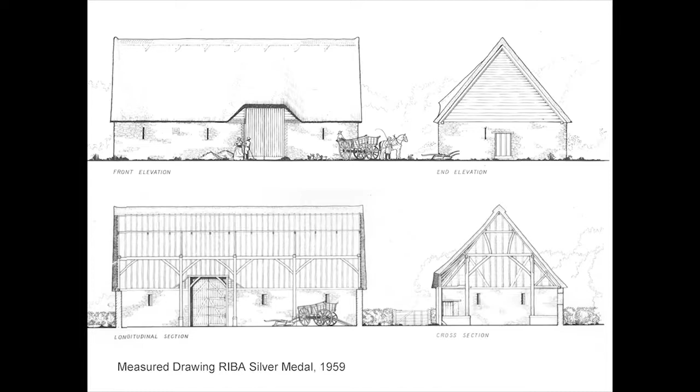So I start really with the first time that I stood on this platform, which was in 1959, with a measured drawing which received the silver medal at that time for measured drawing, and the huge sum of £100, which translated backwards was really a very considerable amount of money and did enable me to travel. I broke the convention at Manchester and concentrated on what would be perhaps later called by Bernard Rudofsky, architecture without architects. I feel there are many lessons from humble, ordinary, wonderfully dignified, simple buildings.

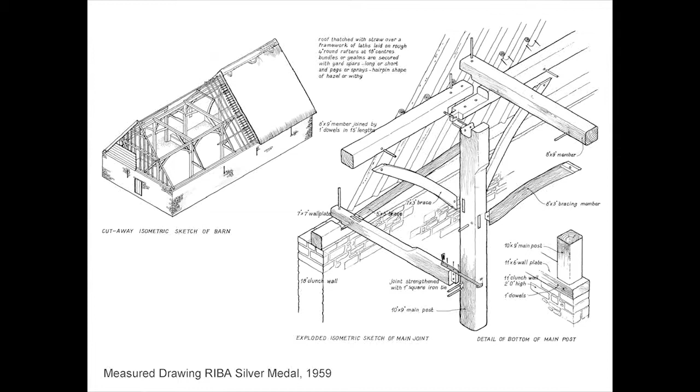But whether it was my interest in the city at the same time, I'm always and still fascinated by the inner story of a building, and not just the building, what lies beneath the surface in terms of a city, an organization, whatever generates the need for a building, or the way in which a building is made. And later, as a student in 1961 in the United States, I became fascinated by another kind of simple barn, the kind of industrialized agricultural buildings here in Kansas, the Great Plains, the Midwest.

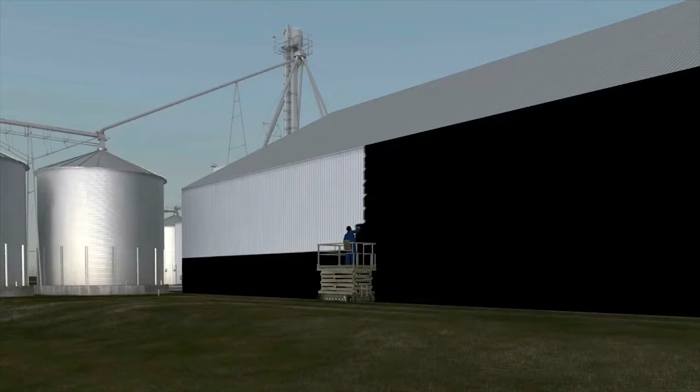And artists as visionaries also fascinate me. I live with this work. It's positioned between our bedroom and our bathroom, so I pass it every day. And it's by John Gerrard. And the story is that Angelo Martinez, this worker, will arrive at this building, open it up, it's filled with oil sticks. And oil sticks are the kind of materials that Richard Serra would use to make his extraordinary black paintings on white paper. And this man is painting with these oil sticks this barn black.

And the story behind that is that the agriculture which generates this building and which depends on oil is finite, it's peak production. This will run for 30 years. It's on real time and it's also imaginary time. It's based on a real building, it's in a real landscape, and it runs day and night, 24 hours. And when it's finally black and all the oil sticks are used up, and symbolically, peak oil, then it will expire, and the way of life that goes with it. Now that's a kind of interesting doomsday scenario.

And the great energy debate is really quite interesting in many ways, because certainly all the previous predictions about oil have proved to be wrong about when it does peak. But the reality is that more coal and gas is being used than oil. And over the 200-year period since carbon started, going back to 1800, when the carbon to hydrogen ratio was something like 10 to 1, we're seeing a decarbonization even through fossil fuels. And by about 2100, fossil fuels are predicted to be 90% hydrogen because the ratio has moved to 1 to 4.

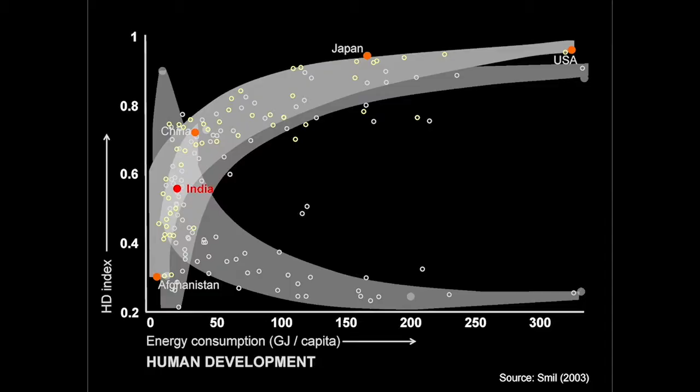And likewise, the index of human development, a complex thing about education, emancipation, or indeed political freedom, all relate to the intensity of energy consumed by a society. So there's a very strong social, moral incentive for the distribution and availability of energy.

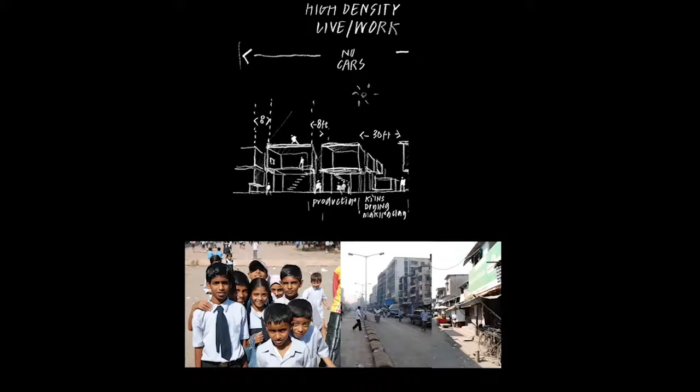And just to briefly give some insights into what makes that neighborhood tick, here's one of Narinder's sketches at the top, and it identifies that 30-foot wide road housing the kilns for one industry, which is making pots.

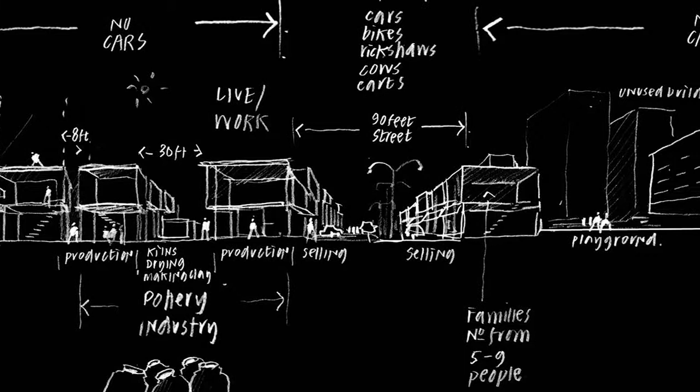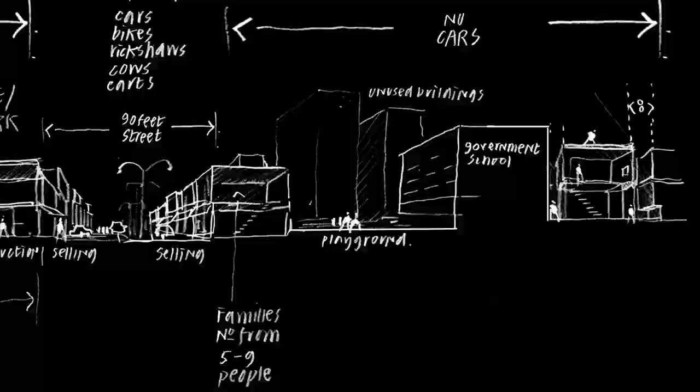And those pots are made, the clay is on site, and it moves through the home, live, work environment onto the street with the traffic, and that becomes the retail shop. And as you move across and you see the government schools which have been injected into that environment, you realize also that the playgrounds and the railway tracks and the cemeteries are the only public open space in that very, very large community.

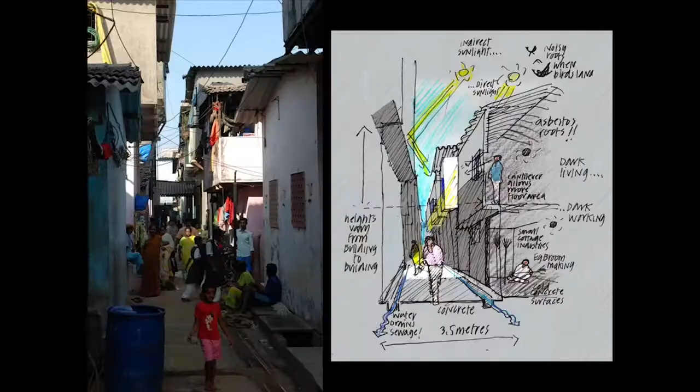And exploring what lies behind the facades, how the activities overlap, how they work horizontally, how they work vertically, and discovering the people who make the brooms, who weave, and whose dependency is literally on the pedestrian crossroads.

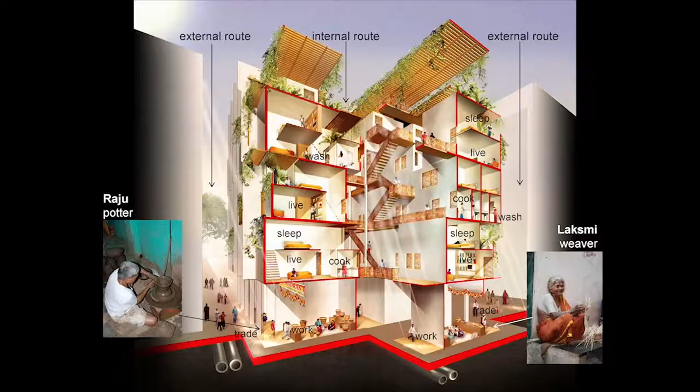That led to the proposition of essentially something that was low-rise, walk up, and would provide an enhanced quality of services in terms of sewage. It would not be open sewage, obviously. It would be a network below these pedestrian routes, which would respect and enhance the best qualities of the existing environment, but obviously significantly improving the standards of living.

And here we see those individuals in terms of the traders, the weavers, the potters, and it also raised the proposition of such an essentially very, very basic structure, which by its concentration would create a degree of open space in the community. And this was a model that would perhaps be able to be applied in phases, in stages.

A key element might well be a sort of heart unit that would address the issues of sanitation, cooking, heating, ventilation and cooling. And we took our inspiration from a unit that a research unit in the practice has been working on, which is a heart unit not for emerging economies, but very much for the developed world,

something that would use less energy, would be a prefabricated unit, could address the issues of heating, cooking, all the things which as separate units would cluster together to make one mass-produced, highly economical core unit, which would save energy, would save space, and would deliver a higher quality of service.

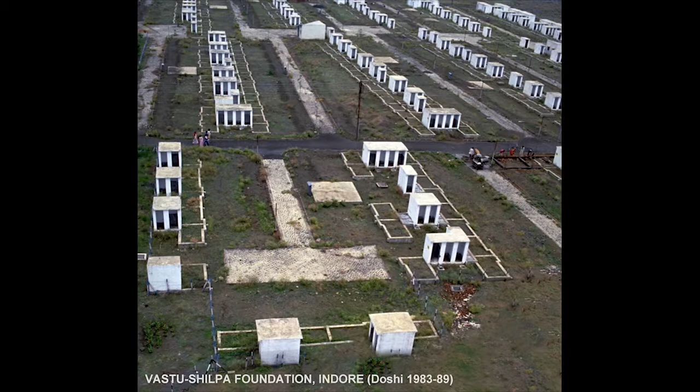And here, the foundations for a unit have been provided, and the equivalent of the heart unit are those boxes which, when you take the box away, reveal the heart, which is the sanitation, and also the kitchen, the basic essentials. And then emerging around that is this extraordinary, very, very vibrant community. And interestingly, just to the right, behind the trees, you can see that vacant plot is waiting for somebody to do a self-build. It's a very, very small extract of an extraordinary, rich series of images of that community.

The percentage of the population, the over 2 billion who live in the slums at the moment, and the proportion without sanitation, again, 2.5 billion, or a quarter of the world who don't have access to power as electricity, or even in terms of clean water, 1.1 billion. Adequate shelter is nearly 2 billion.

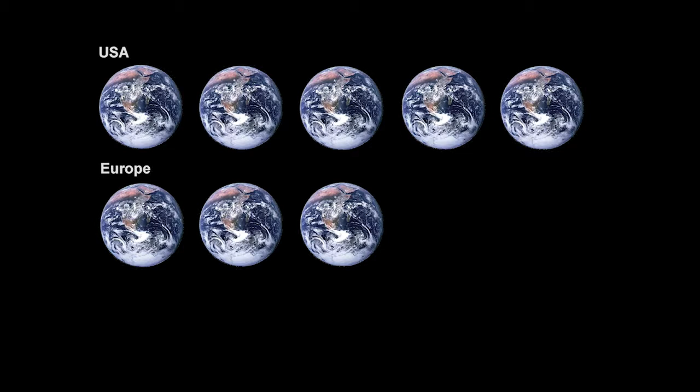And it's important, I think, to remember that it's only because of that that we, in our part of the world, are able to have the quality of life which the World Wildlife Fund would calculate would be in America something like 5 planets, and in Europe 3 planets. So it's a very interesting question about how, given all these debates about energy, population, changing quality, we achieve a one planet existence.

And it's really against that backdrop that I thought it might be interesting to share some of our reflections, observations, and experiences in the quest for sustainability. And obviously the imperative, and people have put it in different ways, but essentially the challenge is how to maintain the quality of life, to extend that quality of life across the planet. And obviously the challenge is doing more with less.

And Buckminster Fuller, a mentor, a dear colleague for the last 12 years of his life, this is the autonomous house that we worked on together, the solar house. That was in 1982. I became much more involved through the exhibition of his work in the Ivory Gallery in Madrid, which I co-curated as an exhibition with Luis Fernandez Galiano.

And in the process of that, had some extraordinary insights into this man who, in 1927, conceived the idea of a Zoom-mobile. And the Zoom-mobile would be an emancipating vehicle that curiously anticipated the Harrier jump jet of many years later. And he saw it, the air-deliverable Dymaxion house would enable, with the Zoom-mobile, you would travel in ground effect or you would fly. And in that sense, you would be liberated from the whole road system.

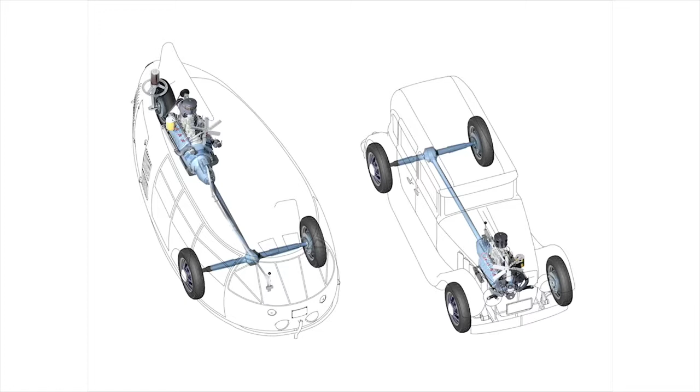As a consequence of that, I took the initiative of creating a fourth Dymaxion car, which coincided with a kind of 75th anniversary, because car number 3 was in 1935. Interestingly, Bucky had a friendship with Henry Ford, and the deal was that he could get any component with a 70% discount. So his car, which he did with a yacht designer called Starling Burgess, took the flathead V8, beloved of hot rod enthusiasts, and the transmission and gearbox of a 1932 Ford sedan, and literally put the engine at the back, the drive at the front, turned it through 180 degrees, kind of tiller steering at the back.

And so it's a very interesting comparison between two cars because they share the commonality of the drivetrain. And it's always fascinating how the first of any series, any design classic, whether it's the 356 Porsche or whatever, this is car number 1. And it is extraordinarily even purer than the one that I showed earlier.

And in the spirit of doing more with less, with the same components, Bucky got a car which was 3 times the volume. It had 50% increase in top speed, but significantly, at a time when there was no energy crisis, its fuel consumption was half of the Ford of the day. And in that sense, it anticipated the people carrier of today. So again, Bucky was always decades ahead.

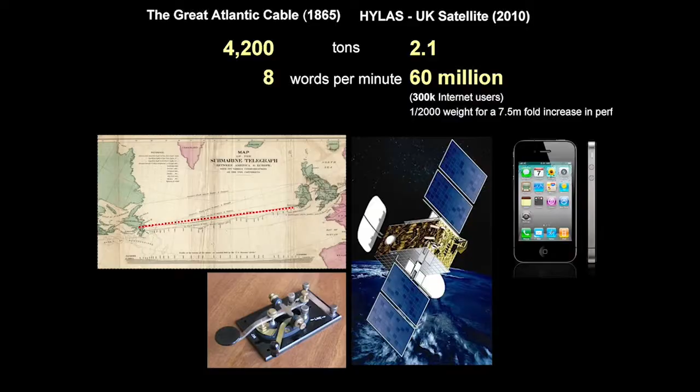And I remember him talking about the analogy of doing more with less around the great Atlantic cable of the 19th century, and how that compared with the satellite circling the globe, comparing something like 4,200 tons with 2.1 tons of that satellite, and then the familiar iPhone. So you're comparing 8 words a minute with something like 60 million. It's even more dramatic when you look at the computing power not that long ago, 1946, 30 tons. And this, again, the familiar iPad. And incredible comparisons in terms of operations per second, from hundreds to billions.

Slightly different story in the world of some of my own more private passions, cycling. The comparison between the Tour de France in 1906, obviously more with less in the sense of lighter, more efficient bicycles. But really that's only accounting, according to one estimate, for something like 12% of the difference. 88% of it is much more biological in the sense of techniques and drafting.

And once a year, I cycle with colleagues significantly younger than I am, and the only way that I can keep up with them is that I'm in the body of the group behind, and the younger guys are at the front. And the consequence of that is I'm only using something like 2/3 of the energy that those at the front are using. And the same is true of another passion, which is cross-country skiing. And here we see in the Engadine Marathon, that formation is almost like birds migrating.

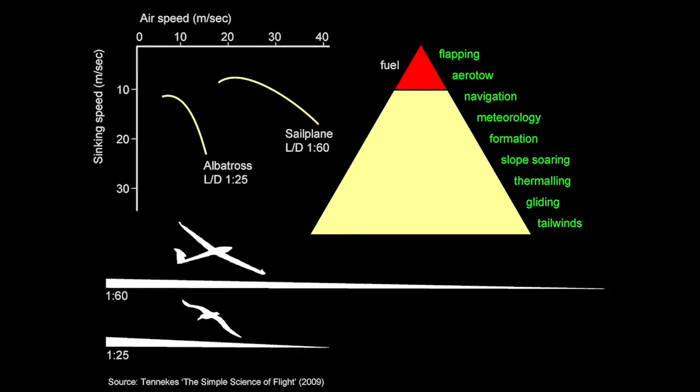So the glider and the bird are working with nature and the elements to minimize the amount of fuel for the journey, which in the case of the bird is flapping, and in the case of the glider is the aerotow, which will lift it to a certain height, let go of it, and then the sailplane is off for what, 2,000 miles? I don't know. I mean, the performances are quite remarkable.

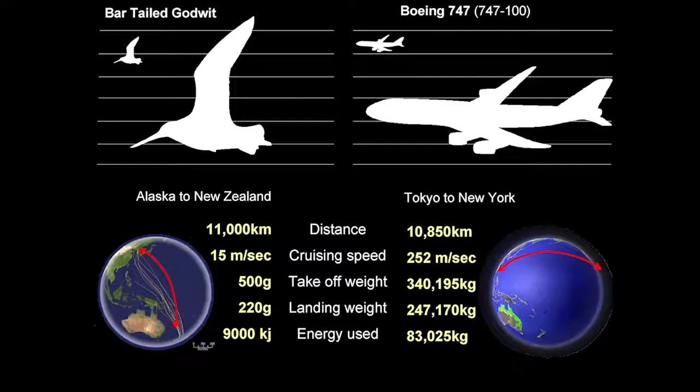It is interesting to compare epic journeys by birds and the earliest generation of 747s, although they're in the process of being overtaken. But for example, the bar-tailed godwit will fly in one hop from Alaska to New Zealand, a similar distance as the 747 from Tokyo to New York. They will both lumber off the end of their respective runways, laden with fuel. The bird will have consumed more than half its weight in the fat that it's stored up over that journey.

Its navigation system will enable it to use its energy to penetrate crosswinds, to find high elevations where it will be able to take tailwinds. In the same way, the 747, with its huge intake of fuel, will be moving up and down in the air depending on the winds aloft and its weight as it consumes the fuel.

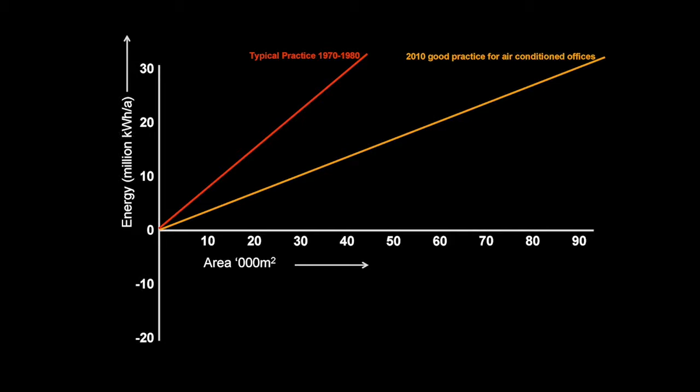And just being very, very selective for the purpose of this evening, just taking very, very few of the many examples which we have analyzed. And I say we've done it as architects. We've had to develop those facilities, that kind of know-how and the equipment to be able to do this, as I'll show in more detail later.

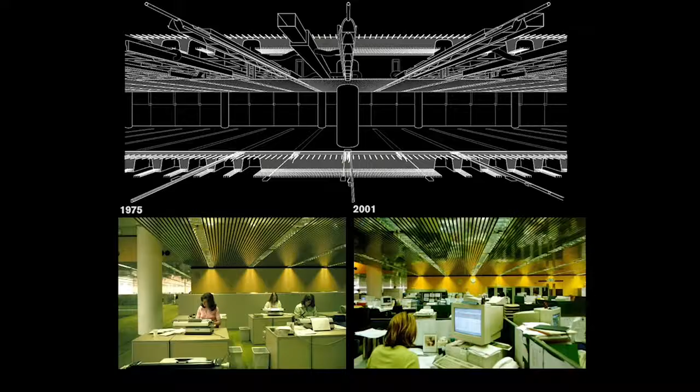And so if that was current practice in the 70s, and you compare that with good practice for air-conditioned buildings today, then in this scheme of things, where would Willis Faber fit? And interestingly, in terms of adaptability and going back in time, that building was able to accommodate the shift from typewriters to, a short time afterwards, the whole information technology. And that thing about what lies behind the surface of the building that makes that possible. So if we took Willis Faber and we took Commerzbank, how do they look?

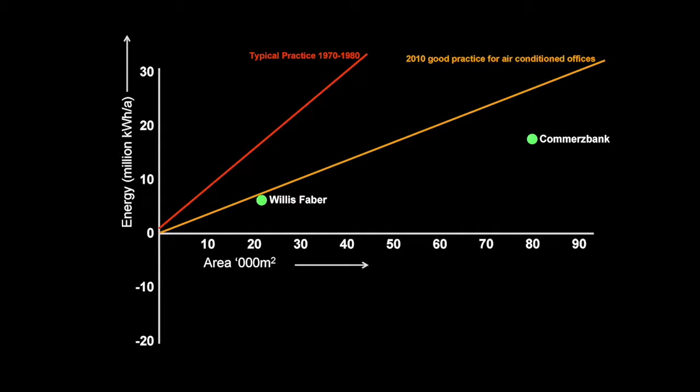Well, a fantastic performer in terms of the performance line, the trend line of its time. And in that sense, way, way ahead. And interestingly conceived 1973, and so many years later, nearly 40 years later, it is still, despite the technology of its time, a better performer than the performance line of the day. And that is certainly true of Commerzbank.

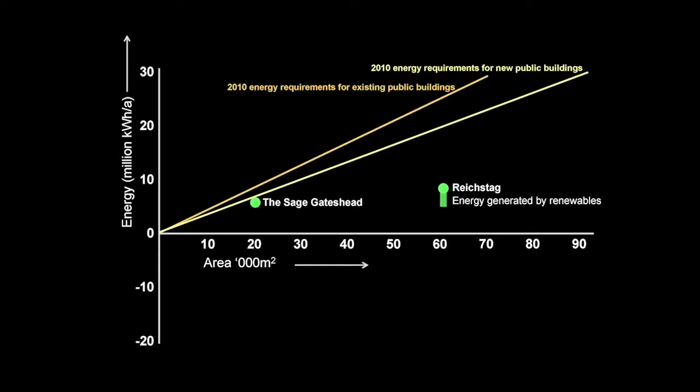And if we moved away from the world of offices to public buildings and started to look at, for example, the Reichstag with its green agenda and the SAGE, and we look at the performance compared with the lines that define the standards in terms of existing public buildings and new public buildings, again, with energy generated by renewables, fairly outstanding performers.

Now, over that period of time, we have evolved our own in-house standards, which are much more design-based. And depending on the relationship with the client, mindful of the fact that the architect is only as good as the architect's advocacy. So obviously, this is critically dependent on a dialogue with the client. On the Reichstag, it was a sympathetic ear, and the whole idea of a renewable energy concept was taken on board. But in our own approach, this far exceeds in its scope any of the standards called BREEAM or LEED or other names.

And just looking a little more at that in depth, the principles are the environmental gain in terms of that bottom part of the triangle and moving upwards at greater degrees of comfort. That bottom part is about conservation, it's about passive design, it's the primary decisions, whether it's a building or the design of a city or a neighborhood, about the form, the massing, the orientation, the air movement, the enclosure, the shading, the insulation.

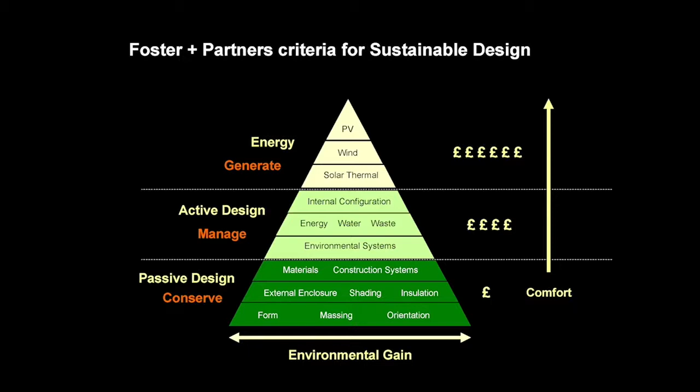Moving up is then those other elements of active design, the management, if you like, the way in which the energy can be recycled from waste, the way in which the water can be conserved, treated, purified, the environmental systems, the internal configurations.

And finally, it is those elements, and you can see the affinity here with the sailplane, with the albatross. It's working with the elements, it's working with nature, so that the minimum amount of energy needs to be generated. Ideally, the building or the community will harvest its own energy, but whichever way, it is seeking to minimize that and at the same time maximize the level of comfort. The level of comfort, again, in terms of performance.

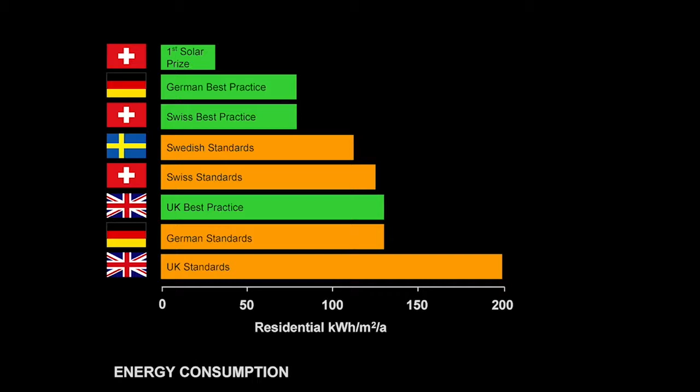And if we look at our various projects around the world, you can see that based on our own internal criteria, the accreditation by LEED, BREEAM, and others has followed, as it were, seamlessly from that. It's quite interesting to look at the regulations across the world, this one in terms of energy consumption. And I became aware of the vast differential in standards when I recently was asked to be involved with a prize in Switzerland for energy and architecture and building practice.

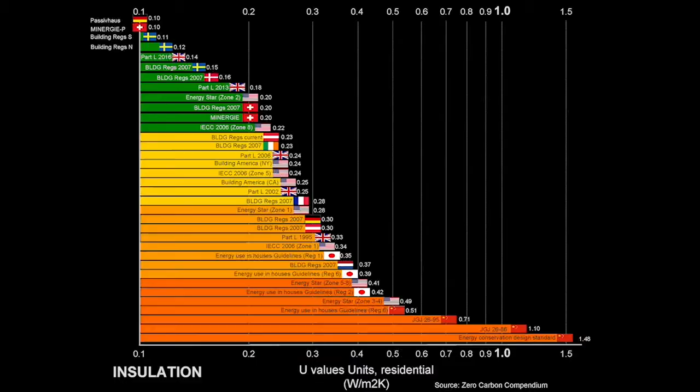And it's interesting, the differential between the standards there in terms of energy consumption, even more interesting when we move to this image and we look across the world down to China, Russia, America, and this is about levels of insulation. And the first reaction, of course, is to say, well, those countries at the top, they're Scandinavian, they're the colder countries in the world, and therefore their regulations are going to be more demanding. But that, of course, is not true, because you only give it a moment's contemplation, and you realize that China and Russia have places far, far colder than any of those Scandinavian equivalents.

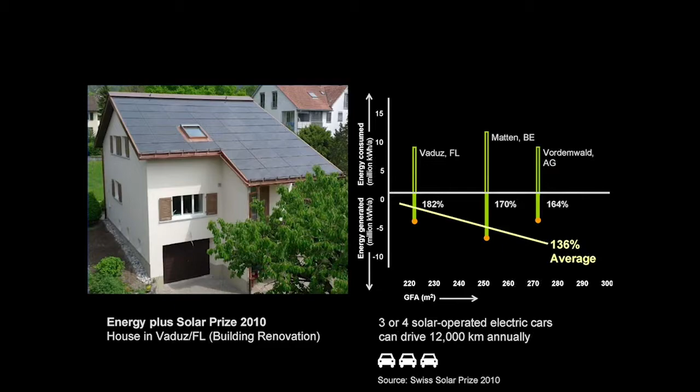And I spent quite a lot of time on this award. I wasn't on the jury, there was an independent jury, and there were 6 schemes. This little building on the left is generating 182% of its needs. In other words, it covers its own energy requirements, and there's an 82% surplus energy, enough to drive 3 or 4 electric cars for 12,000 kilometers annually, if you like. The average was 136%. So these are not zero energy buildings. They're actually generating energy and feeding it back.

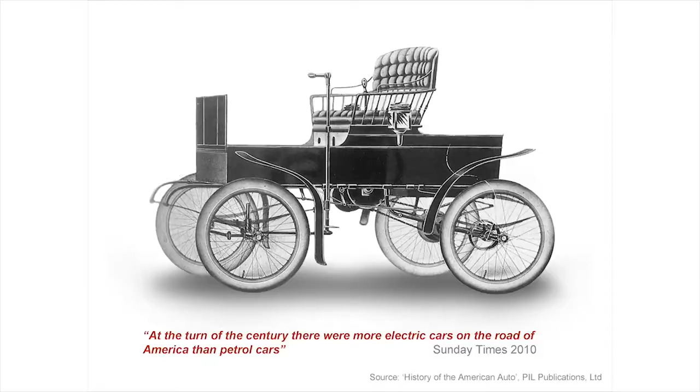1921, the number of streetcar systems, one electric trolley car for every 2,500 people in America. 80% of the US population used public transport. In 1950, a subsidiary of General Motors bought and burnt more than 100 electric traction systems in 45 cities. So really we're talking about 1950, the emergence of the car, suburbia, and all that follows from it.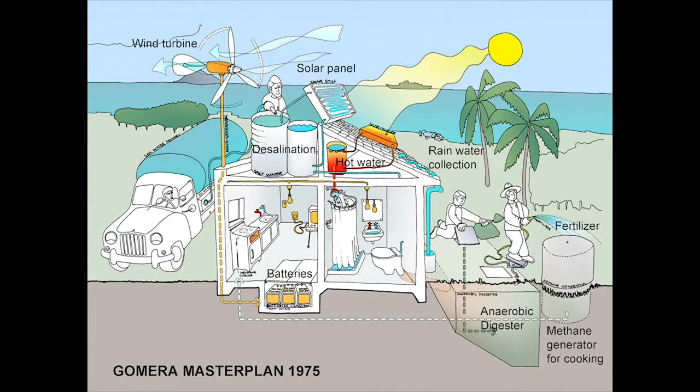Interestingly, seeds of both these schemes were set in an earlier project of ours in 1975. And this is almost like a mini Masdar. It has the fertilizer, it collects the rainwater, it desalinates the salt water, it has an anaerobic digester, it manages the waste, it turns the waste into energy. It has all the ingredients anticipated in that master plan for Gomera in the Canary Islands in 1975.

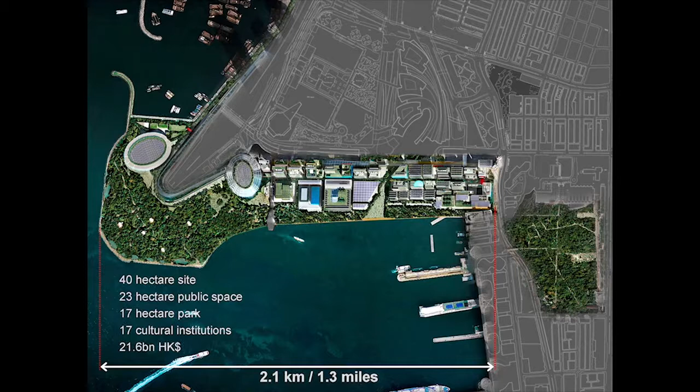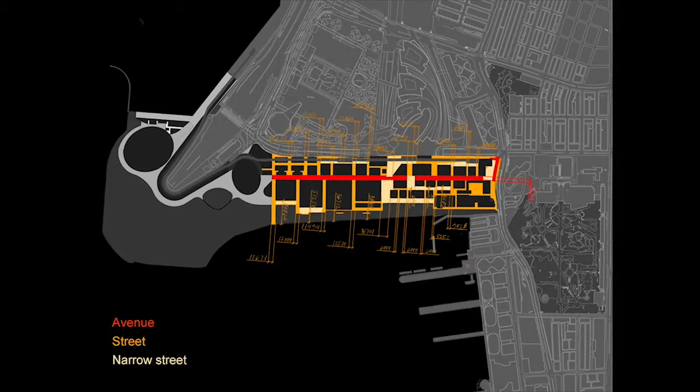And so here, in the context of this very bold infrastructure initiative in Hong Kong, very large site, incredible investment, many, many cultural venues. But the core of the thing, which fascinated me far, far more beyond the potential for the individual freestanding emblematic buildings, was the actual urban quarter, the way in which you would grow the city of Hong Kong. And in that spirit of dissolving the architecture and the infrastructure, then where would that lead you?

How would you analyze the essence of a city like Hong Kong? How could you recreate its DNA? And it was very much derived from a study of creating a main boulevard, a main axis. It was what you saw in red on the previous diagram.

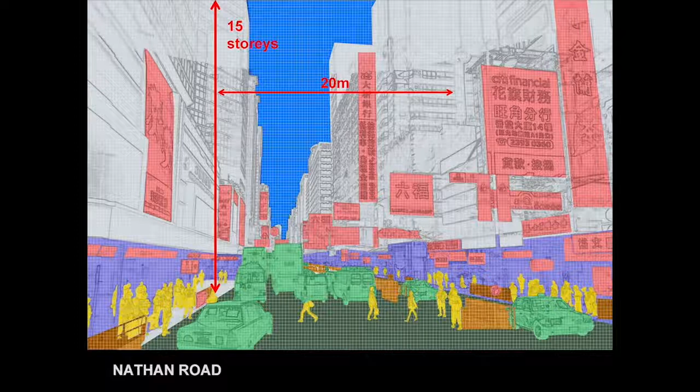Influence here of Nathan Road, and then analyzing Nathan Road in terms of its signage, the retail face, the fields of cars, of people, and analyzing those in terms of quantum and percentage, and then working with those in the abstract, without the buildings, seeing to what extent one could conjecture spines of activity served. In this case, the one on the right is about cars and the movement of the people in yellow flowing upwards into the pedestrian domain above.

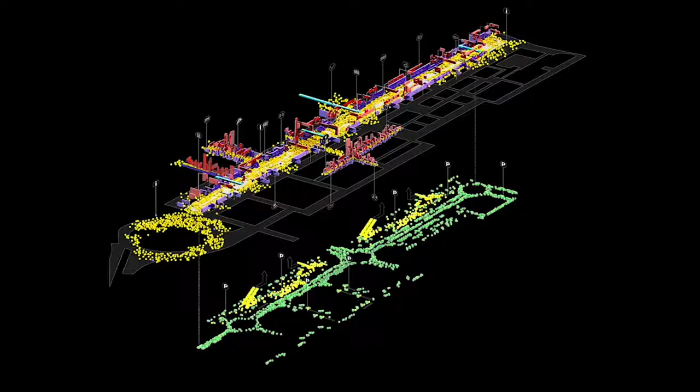And again, another visualization. Here the colors are absolutely constant. The purple is the retail frontage, the red are the signs, the yellow is the people. The buildings are not there, remembering that the traffic is segregated at the lower level. So some of these studies about how you add to a city, how you create a new city, and how you might retrofit an existing city to make it perform better.

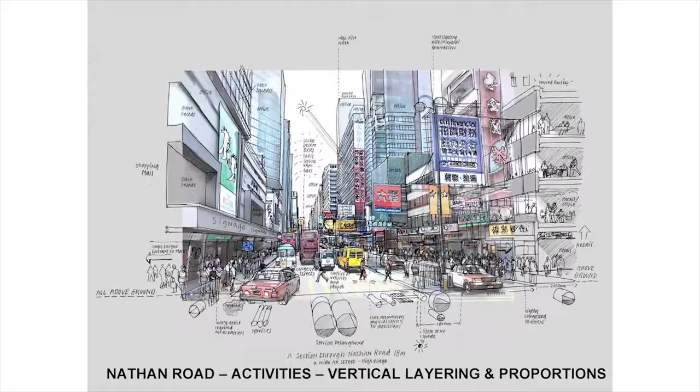And here, looking at the layering of the city, the activities which take place one above the other, as well as the physical proportions. And then through that process, that leads to the creation, in this case, of the main artery, the avenue. But the dynamic of Hong Kong is also about the very narrow pedestrian street, very, very intense with a multiplicity of activities.

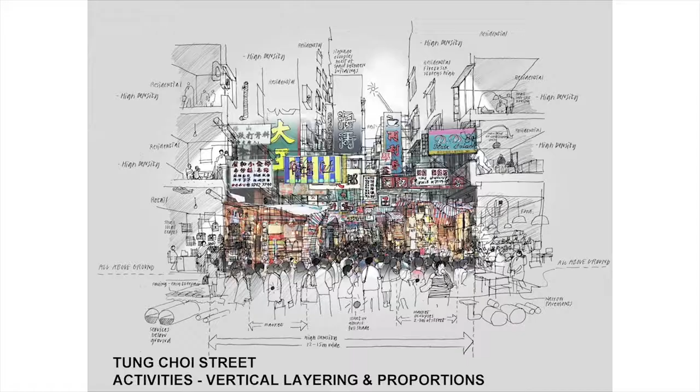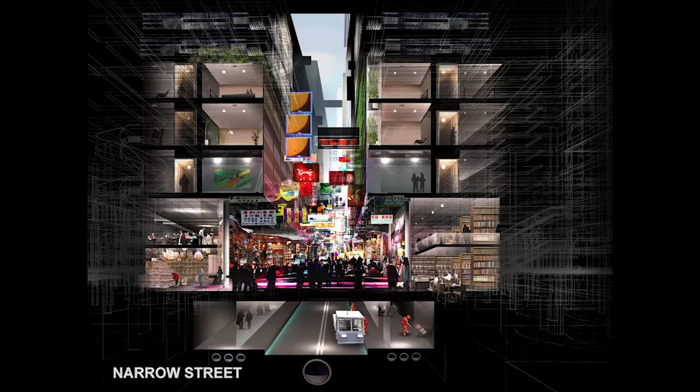And again, we took this particular street as one reference point, and here's Narinda's drawing, exploring what makes it tick behind the facades. Again, the layering as well as the density of those different fields. And that informing here the final proposition for that infrastructure, and the various stages in which you could reduce the carbon footprint, and the creation of a great city park in a very, very dense city, which uses the species which you would find in nature.

And again, in this instance, the 5,000 trees are doing their little part in that energy equation by eating up something like 1,350 tons of carbon per annum. And again, very much about the infrastructure. The infrastructure arguably being more important than the individual buildings which it glues together, because that is really about the quality of life in a city, the way that we move around it, the way that we experience those hard and soft spaces and the movement from one to the other.

My colleagues can never understand why, when I make the switch from Hong Kong to Masdar, I always find it important to bring these two friendly creatures in here. Well, there's a kind of rather slightly manipulated rationale behind it. The fact is that the camels have adapted to the desert conditions in the sense that their own temperature can move up and down, unlike humans. So literally, they are cooler than the desert, which is their environment, and they cluster together to improve their immediate environment.

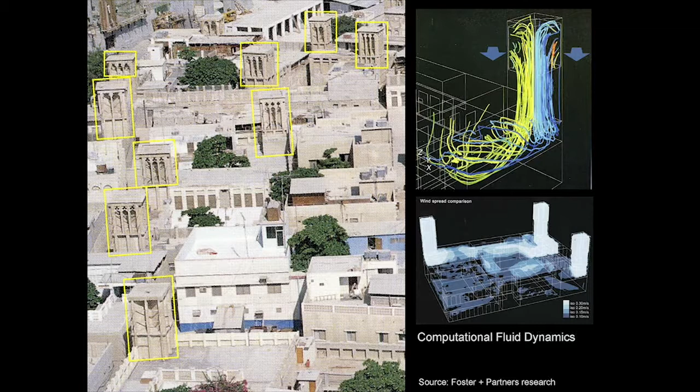additionally scooping the air. And these are traditional wind towers. You can see them on the left. And again, the flight analogy. If you're on an approach and there's a crosswind and you're offsetting for that drift and you land and there's no air movement, there's no wind. So you only have to go slight elevation to be able to capture a breeze.

And these are our computational fluid dynamics done in-house, analyzing those traditional devices, hoping to learn enough to be able to recreate that in a new environment as one of the additional weapons to cool and create a more gentle, higher quality outside environment. And of course, moving in with the insulation and those devices which create privacy and some extraordinarily beautiful traditional interior responses to that.

And I guess that takes us to Abu Dhabi and Masdar, where we're looking at something like in the center of Abu Dhabi, with all its black asphalt, is significantly hotter than the desert which surrounds it. And those are very Western responses to that climate. Again, this is a study by our own in-house team, where we're trying to evaluate the performance of our buildings and our designs by going back afterwards and actually analyzing on the spot.

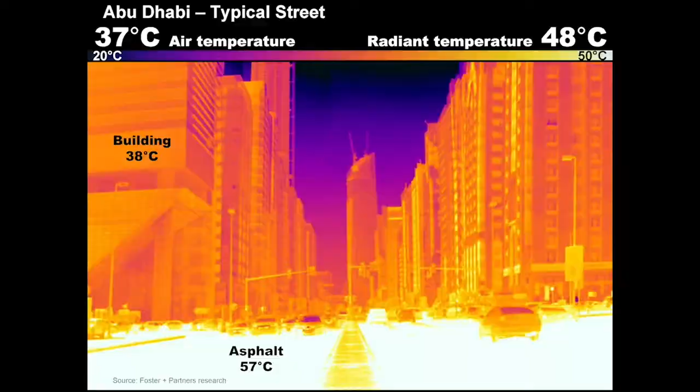And here you can see the different surface temperatures which give rise to a radiant temperature. That's what you feel. Notwithstanding the fact that the air temperature is 37 degrees, you feel it more than 10 degrees hotter because of the reflective surfaces and other elements which I'll come to.

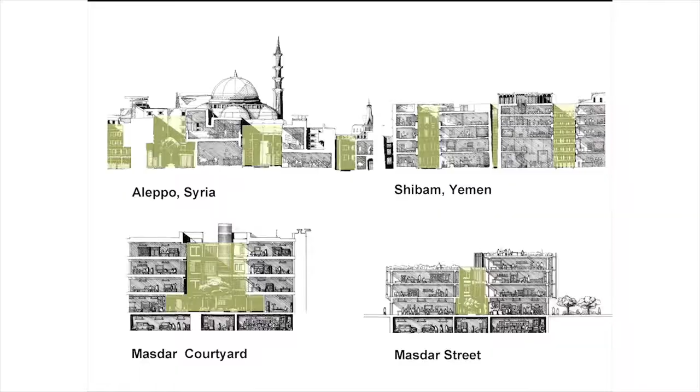Now, we're coming to Masdar, and the drawings at the bottom are just a few glimpses, flavors for what the spaces are, and you can see below that podium the lower, rather like Hong Kong, the infrastructure which is servicing that, serving it, and liberating it to create a pedestrian domain. And it's very much a learning curve from those traditional environments.

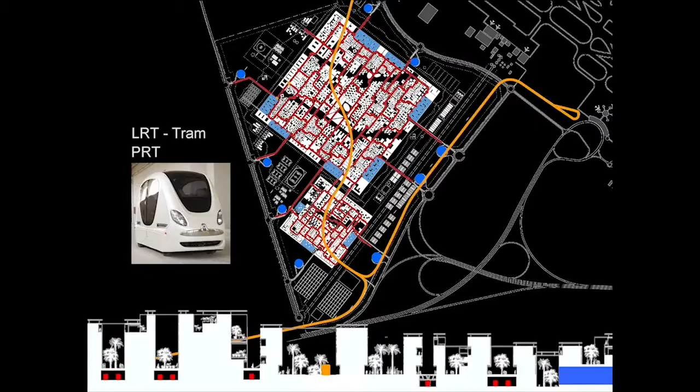And again, orientation is important in terms of its relationship to north and south, the density there, moving across, and the way in which the traditional car is kept at bay on the edge of the development, the tram which moves through it, and in that sense you are always just a few minutes from the tram, and this personal transport system which you can call up, and within a few minutes you can use that. It's a kind of cross between a private car and a taxi.

You have it to yourself, and it will take you the shortest route to your destination, and that provides the mobility within the development. So here you can see a cross-section, and you can see these small vehicles moving at the lower level. They're robots. They run on a magnetic system. Remember, it would be very difficult to make that work with a satellite system when it is actually at a lower level. Very, very different if it was in an external, outside environment where it could be arguably satellite controlled.

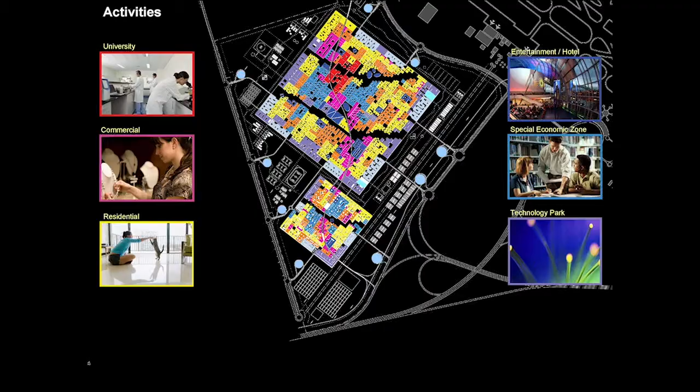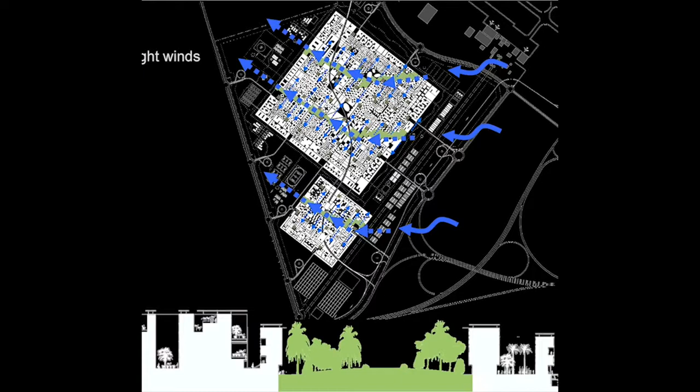A rich mix of activity, technology park, special economic zones, arts, culture, work, students, and a university which is totally devoted to research in renewable energy. Air movement, very, very important, and you're always within 1 minute of a square or 1 minute of a green park. And the green park is very, very important, not just as public space, but also to encourage the flow. So it's orientated towards those cool night winds and the hot day winds.

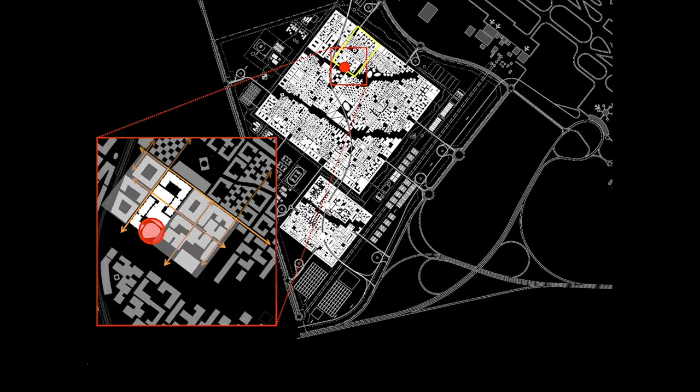And finally, if we extract out, you can see there the darker element on the left, and that is our first stage of 50,000 square meters. We're moving on now to another 75,000, and also committed through others another 90,000 square meters. So this is very much a rolling program.

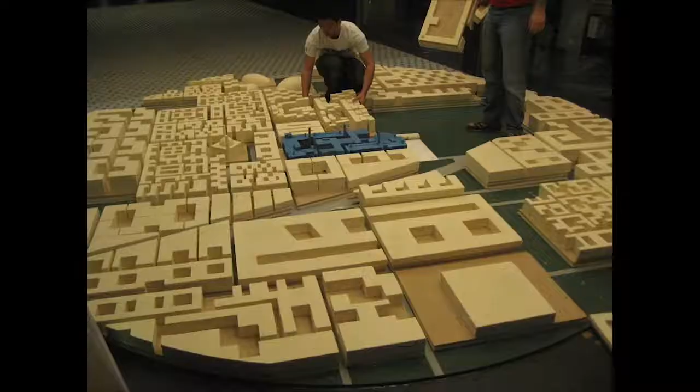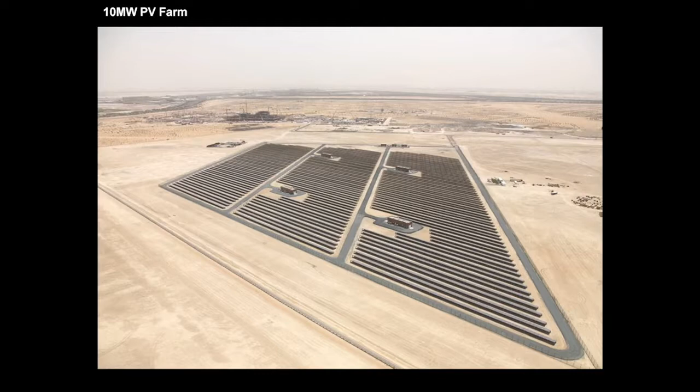Here we're looking at 12 pilot research projects, all of which are underway. They're all there, they're all performing, including a geothermal test well, which uses, interestingly, the technology of oil drilling. So because of the knowledge of drilling for oil and the temperatures down there, the expectation is that that will deliver a massive energy boost in terms of cooling by heat exchanging and converting the heat into a cooling capacity. But each one of these projects, a mega project in its own right.

I mean, just to take one, the parabolic, the Fresnel one there, which will focus and concentrate the sun's rays onto a tube containing an oil, which will raise its temperature to something like 600 degrees centigrade, and that in turn generating steam, driving a turbine. It's completely cutting-edge experimental technology. And obviously, that's not the thing you can put on top of a roof. You don't want liquids pulsing above you at something like 600 degrees centigrade. So very, very much a learning curve.

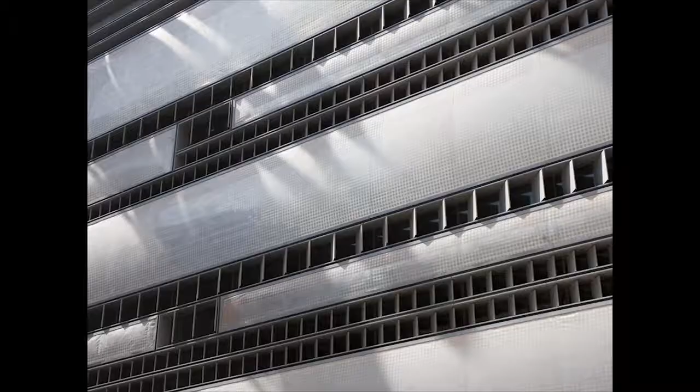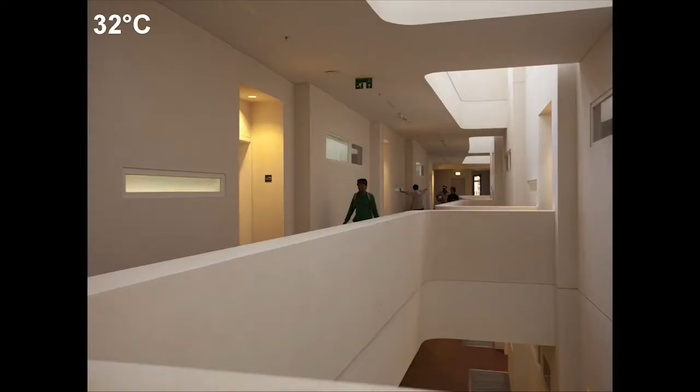And this is the enclosure to the laboratories for the Masdar Institute of Science and Technology. Here you can see the laboratories. There you can see the wind tower on the left there, retranslated from the traditional model. Here in a student room you can see the kind of brise soleil and the balcony in between space there. The way in which the rooms work, the manner in which these vehicles, which are there working, the individual trackless vehicles, the halls to the student accommodation, again a slightly higher transition temperature.

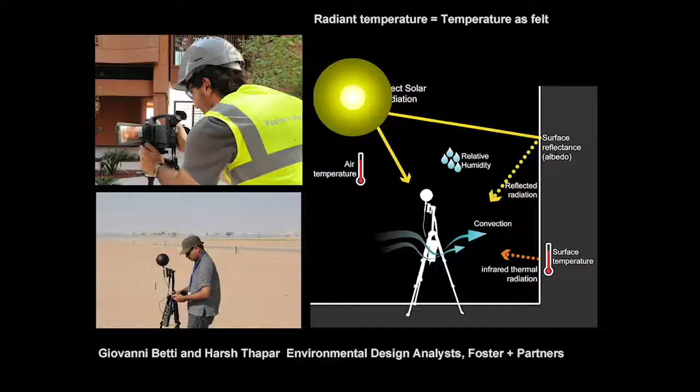And so if we look at this which is built, then we look at our kind of rendering of it, and remarkable similarity, of course. Below this is the personal transportation system. Our own team of environmental analysts have been out there lugging this equipment, checking the performance, checking the temperatures, seeing whether they were up to the predictions, up to the expectations. Are they better, worse? Are they good news, bad news?

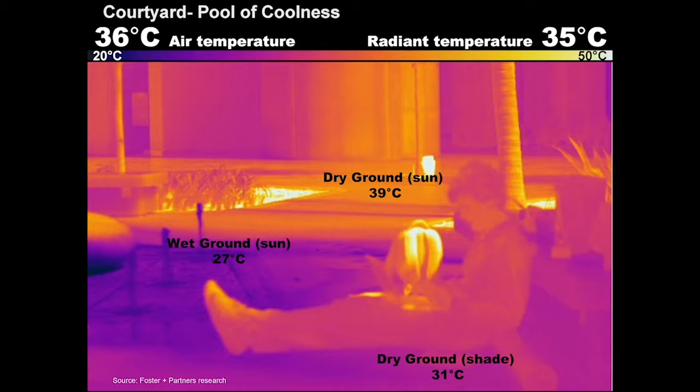And here's one of our guys there, sitting in the shade. Symbolically, interestingly, he positions his feet towards the cooling, evaporative water there. And here we can actually measure and we can compare. And it's good news. The perceived temperature in that instance is 1 degree less than the air temperature.

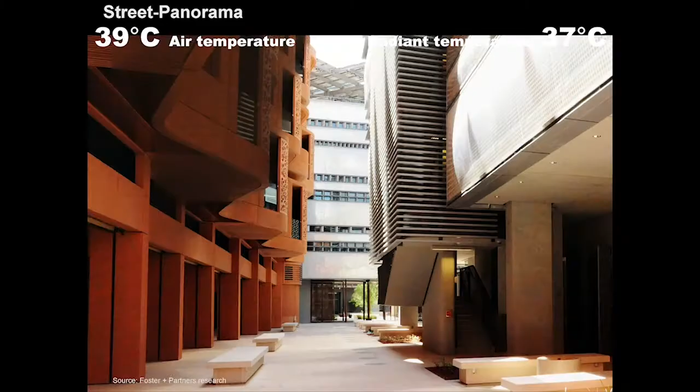Here's another space. And what's the evaluation of that? Even better, the air temperature is 39 degrees, the radiant, the perceived, the felt temperature is 37 degrees. That is a temperature which takes into account the surface temperature, the humidity, the air movement, the surface temperature on one's own body directly. So it's what you feel in the space.

And here, this is not a computer rendering, this is the little personal transport which will take up to 4 people going along its magnetic track. And interesting to compare it in the center of Abu Dhabi with a car engine, which is running lighter color there, very, very hot, people at 30, 40, comparing 55 degrees centigrade with 37 degrees there.

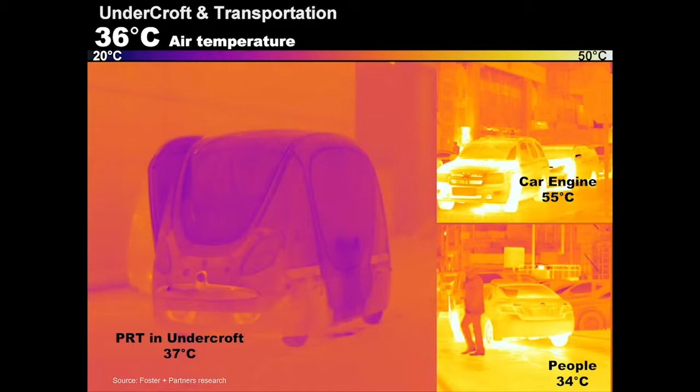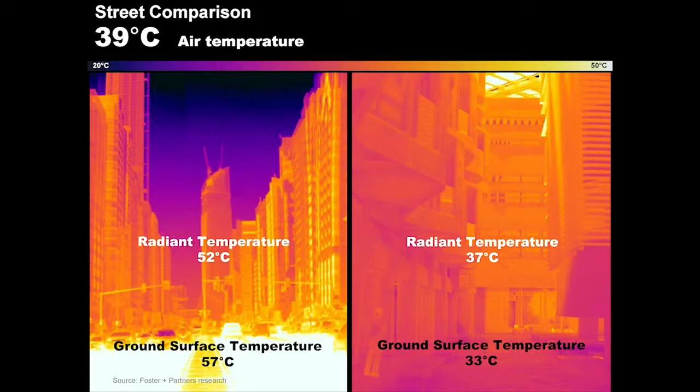And this is, I think, a very, very telling comparison, because this is measured. So the ground surface temperature in the center of Abu Dhabi is 57 degrees centigrade. It's 33 degrees centigrade. The perceived drop, how you feel it, is dramatic reduction from 52 to 37 degrees centigrade.

It's feeding 60% of that power back into the grid. Now, obviously, when this community expands, it will feed less and less back into the grid, because that surplus will also be driving, powering, lighting, generating for parts of the development still to come.

Its power usage and water usage is between 51 and 54% of what is considered normal in the Emirates. So the design has reduced the consumption of those basic elements. All the sewage and the dry waste is processed on site and recycled. And so far, given the scale of this development, we've been able to treat the water, capture it for irrigation and for sanitation.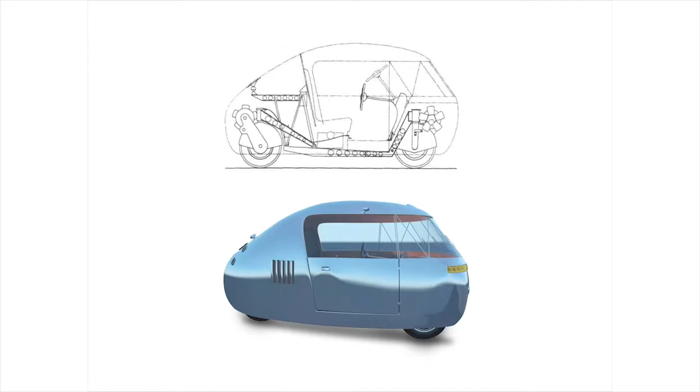Now, if Bucky conceived the car that I recreated, which was in a way a suburban model, his D45, which was the takeoff point for a car design which we have been working on as a research project for ourselves, is this small urban vehicle, which would be able to coexist alongside those robot vehicles which are currently running underneath Masdar.

And a unit in the office, a small film unit, has brought together the proposition of this car, some of the thoughts that I've shared about the degree of automation in terms of very busy routes, and imagined a journey from this car from Dubai to Abu Dhabi. And hopefully, if I press this, the film will start to move.

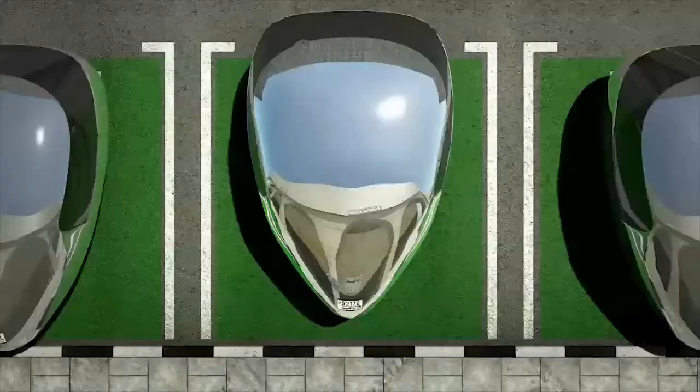So it's moving off, and you'd be driving this car as you would expect to drive a car. You're in control. And you're moving around, you're moving in the direction of Abu Dhabi. And at some point, you're going to go on to autopilot. It's going to become semi-robotic. Of course, it could be feeding the driver information in terms of whether to accelerate, slow down.

And in the spirit of the one version of the D45, which Bucky did for Kaiser, the rear wheel extends at speed when it moves from the urban mode to the intercity mode. And as it enters the city and it slows down and it needs to be much more maneuverable, then it shrinks, it compacts. Here it's going past our central market scheme. Very, very interesting project which seeks to reinvent the souk in modern day terms and replace what has become the traditional shopping mall.

Back in the car, it's decided that it needs to go to Masdar, so it's programming itself, it's going along the road, it's moved out from the center, and here it's arriving at Masdar. Unlike the other car, which is a traditional car and has to go into that blue zone, this is able to change its mode. It's now moving from satellite mode. It's locked into the magnetic system. So it's moving around in that undercroft, coexisting with those existing cars. And it's moving into the induction charging bay, so it will automatically charge itself up.

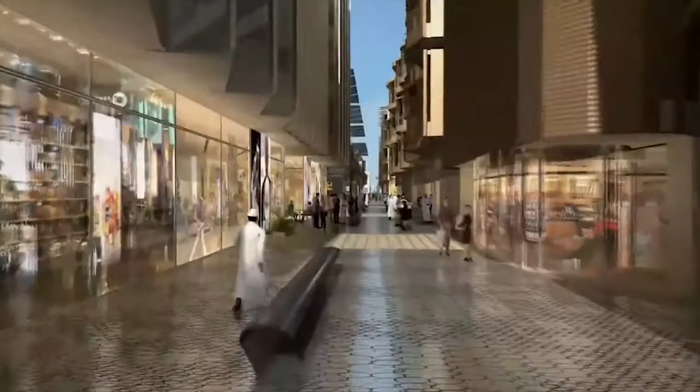This is a real shot. This is not. It's very difficult to tell in this mix which is a computer animation and which is the real thing. Always mindful of the fact that the real thing is there. But of course, at the time that some of this was put together, the real thing was not there.

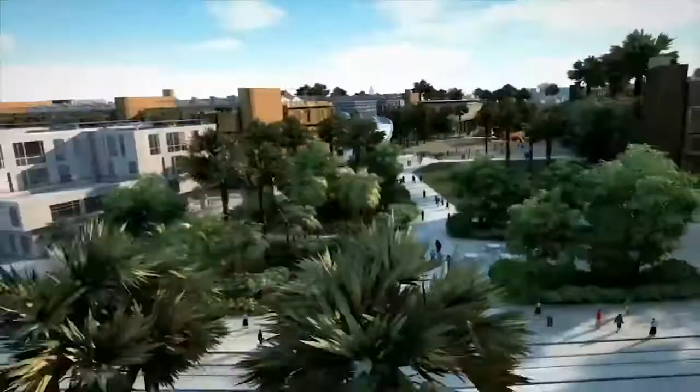So here we're moving down some of those streets, the shading, the orientation, they're cool, the barriers between inside and outside, the wind tower we saw there, knowledge center, we're moving in the knowledge center here, laboratories, offices, production areas for making new forms of cells, which probably have not even been invented yet, but which will be invented here in the life of the project.

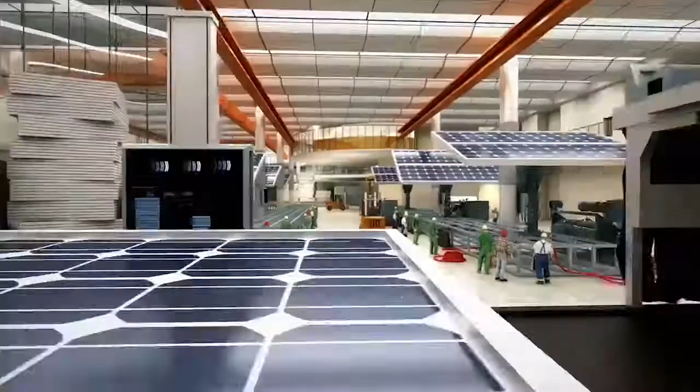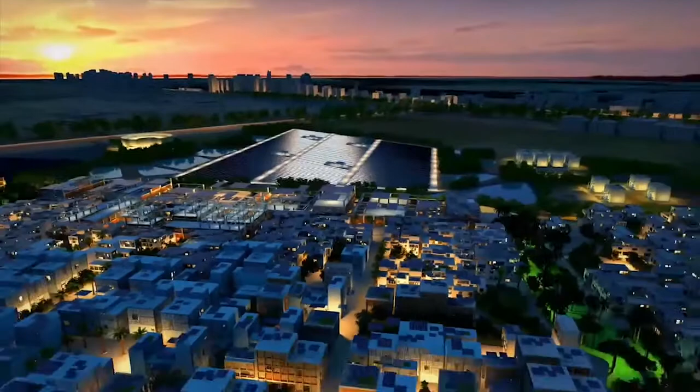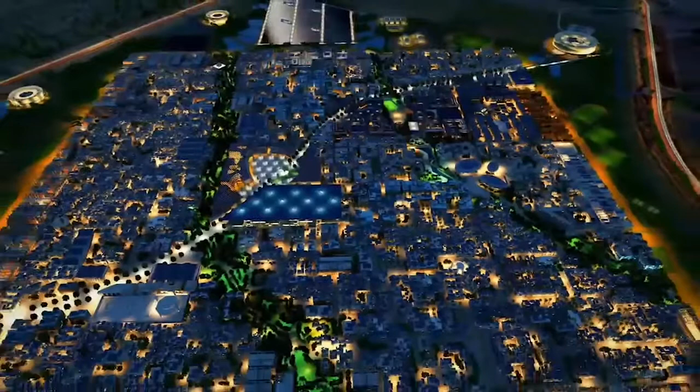There we've had a kind of quick run through, we're pulling out, and we're moving towards the end of this snapshot of flavors of this living experiment. Thank you.